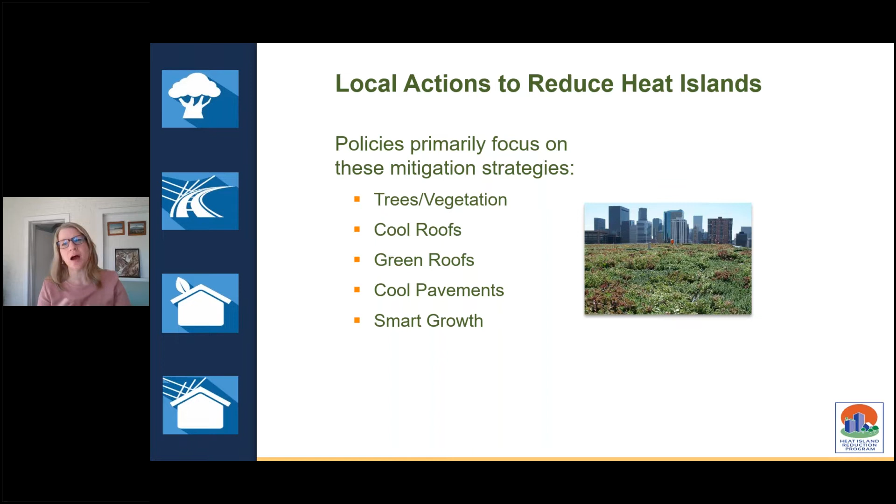Smart growth is something that we encourage people to look at because it's a way to sustainably develop our urban areas in a way that improves livability, walkability, and also incorporates a lot of these heat mitigation options, so that even though the city might be densely packed or designed, it can still be cool and have a reduced heat island.

The 2 buckets in general that are available to local governments for almost everything they do are voluntary and regulatory. And these voluntary options are just a few. And they range from the classic outreach and education, things that governments do to raise awareness of these issues. Those are kind of standard for most everything. Financial incentives, local governments are getting more creative.

A few examples are giving rebates for the construction of cool roofs. A lot of utilities also do that, actually, and that helps reduce energy. There are tax abatements in some communities for planting trees when you are constructing a new building. Some communities, if you are installing a green roof, will give you preferential permitting, which most developers love because it helps them go through the permitting process a lot faster.

Many, many cities give away trees and do workshops on tree planting and care. Grants, some localities just give money for demonstration projects and tree plantings like you see here. They give those to community groups, businesses. Award competitions, some of the classic things that local governments can do to encourage behavior change in a way that reduces heat islands.

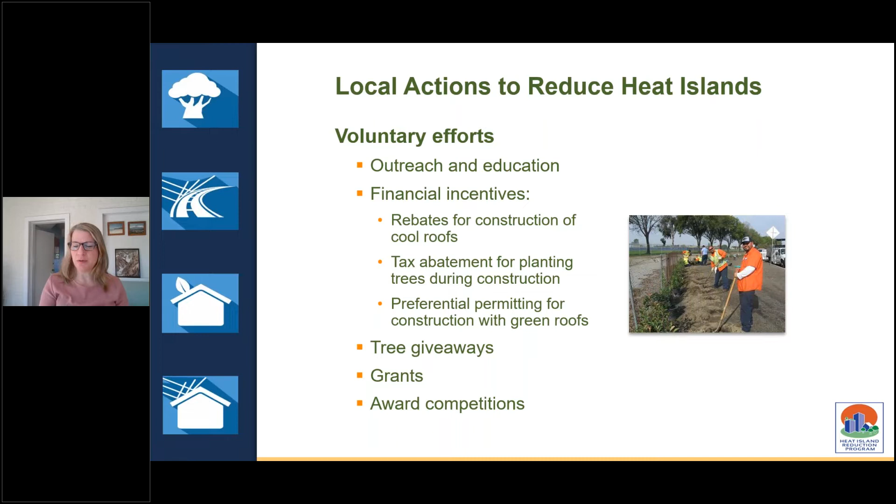On the regulatory side, these are just a few, again, for those localities that have control over their building and energy codes. They have a wide variety of options. One that is listed here, Los Angeles has been doing. They require that new homes in the city put on a cool roof. The utility will give a rebate, so that helps. But this is kind of an innovative way, at least as far as the residential sector is concerned.

Zoning laws, oftentimes if you have a parking lot, you are required to have shading, or sometimes the size of your parking lot is restricted in order to just save space, but also reduce hard surfaces. Tree protection and landscaping mandates, several cities and counties require you to get a permit before you remove a tree.

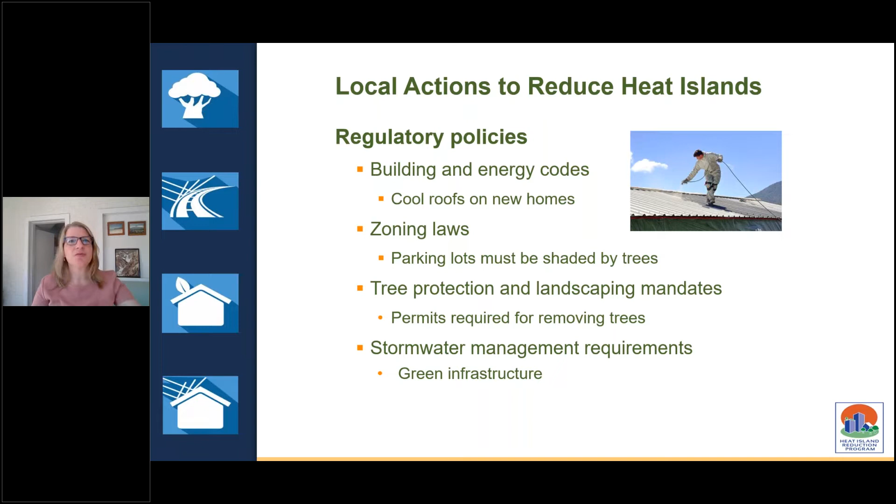And stormwater management, as we'll hear about from both of our speakers, even though a lot of those laws around increasing green infrastructure are focused on reducing stormwater runoff, they do have a heat island impact. And so this is a way to also encourage heat reduction through some of the stormwater regulations that are out there. So I wanted to be quick.

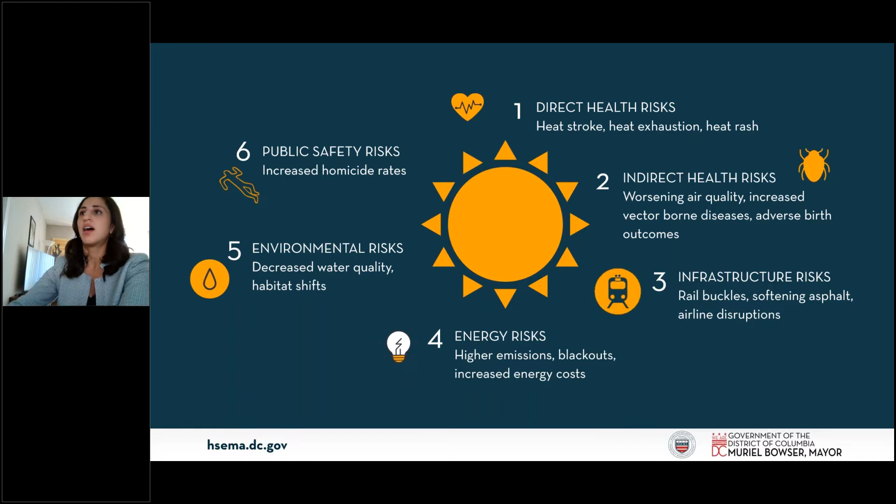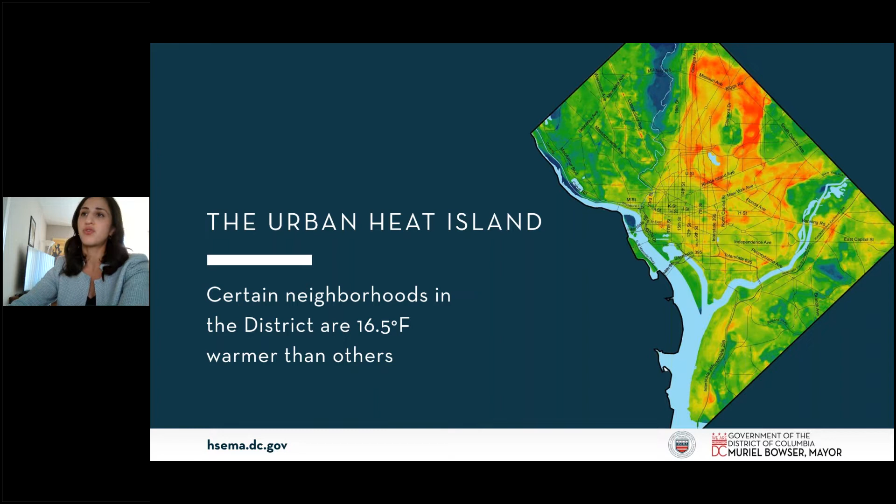And so we wanted to bring together all of the different agencies and stakeholders that have a role to play in heat and work together to develop a plan. So from the very beginning, it was an interagency process. So the heat plan draws on some of the mapping and modeling that I know the last webinar focused on. So I'll run through this pretty quickly, but we did have the NOAA pilot of looking at the urban heat island and have used the ambient air temperature map that they created in all of our work to really identify where to focus in on strategies and what the issues are within the district.

We layered in information on demographics, and we actually created a few different versions of a sensitivity and exposure map. So the sensitivity map is really showing the demographic characteristics. So it looks at age, pre-existing health conditions, income, race, all of the things that we know increase your sensitivity to heat. And then our exposure map takes that ambient air temperature map and also adds in information about our tree canopy and impervious surface. And then we created a combination map.

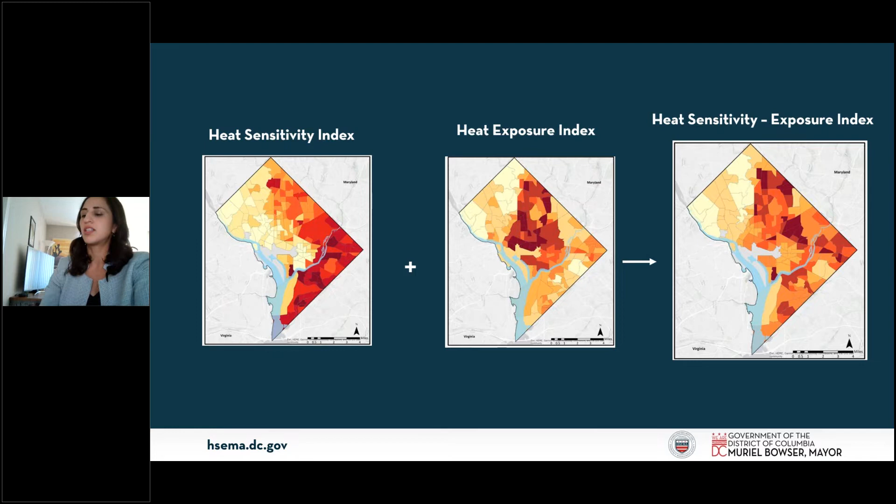And we actually have a couple different versions of this combination map, one that overemphasizes heat sensitivity, one that emphasizes heat exposure, and then the one that you're seeing here is 50-50. And the reason why we did that is because if we're doing policies that really target the heat island, we might want to focus those on areas that have high exposure. And if we're doing policies that target more social programs, we might want to focus more on areas of high sensitivity. So we wanted to look at all of those factors.

We also did a follow-on to our heat mapping work with Vivek Shandas, the same researcher that's behind some of that work, to really try and understand which interventions actually make a difference when it comes to reducing the urban heat island. And underpinning that was a question about affordable housing. So the district has a goal of building a lot more affordable housing in the district, and we have the question of, can we both support our affordable housing goals and our urban heat goals, and understand a little bit more about which interventions work in the process?

And so we looked at 3 different blocks throughout the district. I'll go through 2 of those where there was going to be housing built, and said, can we do something to increase affordable housing and decrease heat at the same time. So this block actually is one where there was no slated redevelopment.

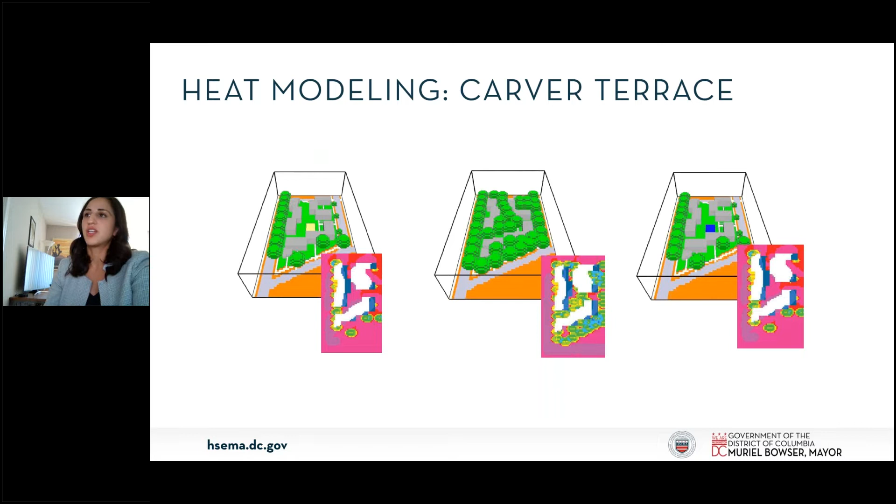It's already affordable housing. And so we just asked, what can we do to make that area more comfortable? And we looked at adding lots of trees. We looked at adding a water feature. We looked at cool pavements, and really found here that trees were the only thing that made a significant difference.

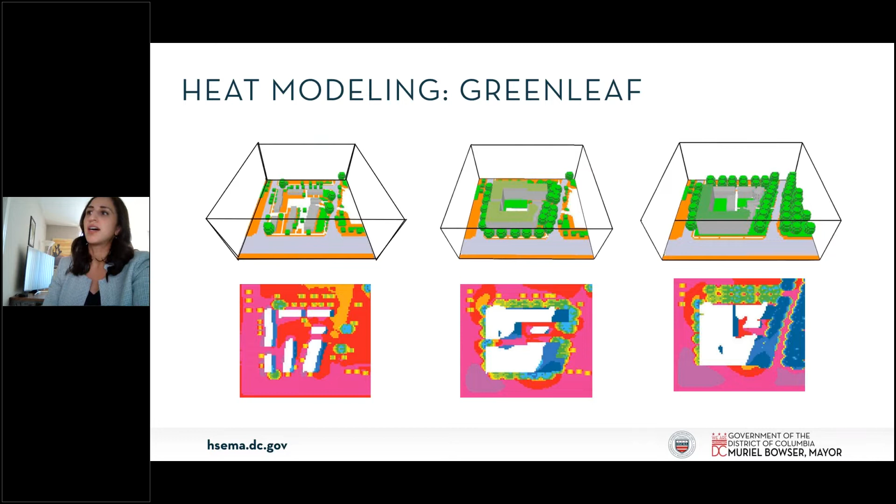So some lessons that we learned from this is that trees really were the big winner, while green roofs and cool roofs may have an impact on the building efficiency and may be useful at scale. And that's something that we're actually looking into with the EPA. At a single block level, as we were looking, they didn't seem to have a big impact on pedestrian level heat and thermal comfort.

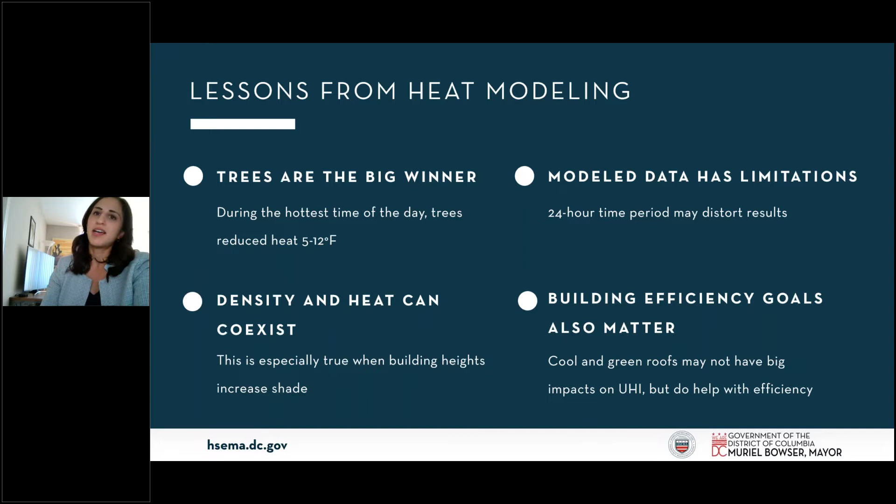And we also found that density and heat can coexist. So the third one that we looked at was actually a totally vacant property, and what happens if we added a building to what is now a grassy field, and we were able to decrease the urban heat island in that property. And so that was really encouraging, though all of that to say with the caveat that this is all modeled results, and should be verified with real life measurements. So that's the next step.

And then the final piece of feedback that went into our heat plan was community feedback. So we had to pivot a little bit about what we were doing to collect community feedback because we were doing this in the midst of a pandemic. But what we ended up doing was holding four 2-hour focus groups with those communities that are most sensitive to the heat. So we had one that was a Spanish language focus group, one that focused on people who have experienced homelessness or service providers that work with people who experience homelessness, and then two that really focused on some of our lower income neighborhoods and elderly residents and residents who live in public housing, and just learned a ton through these focus groups.

Nuances like that our housing authority actually charges extra for people to have a window AC unit during the summer, and that's prohibitive for a lot of people. And so that provided a lot of context for what we did. And then we also wanted to have something that was a little bit more representative. So we did a survey that was an electronic survey, and that was specifically aimed at getting a good demographic mix of the city and the different neighborhoods.

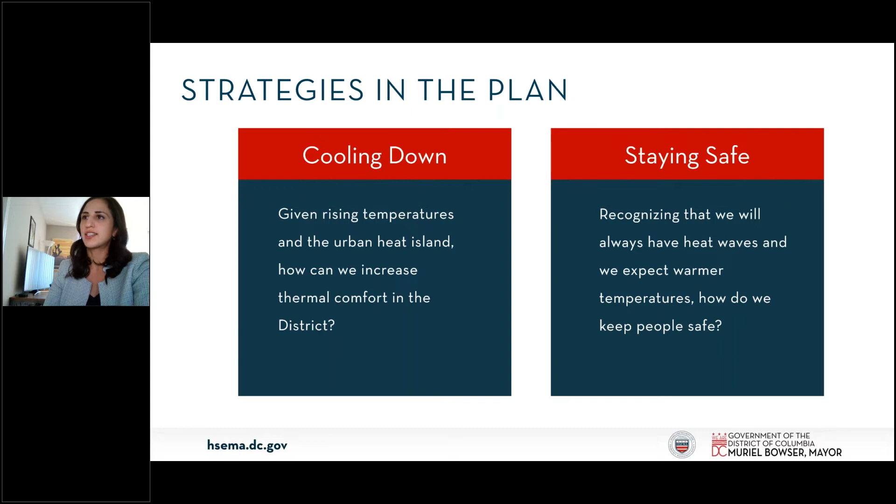So what's in the plan? We've divided the strategies into two basic chapters. Strategies on things that reduce the urban heat island, and then strategies recognizing that no matter what we do, we're still going to have hot days. So how do we keep people safe? And so I'm just going to run through some of the broad categories and then talk in more detail about some of these. But in the cooling down, it's a focus on increasing cool spaces where people feel heat the most. So where people are outside, where people are really exposed.

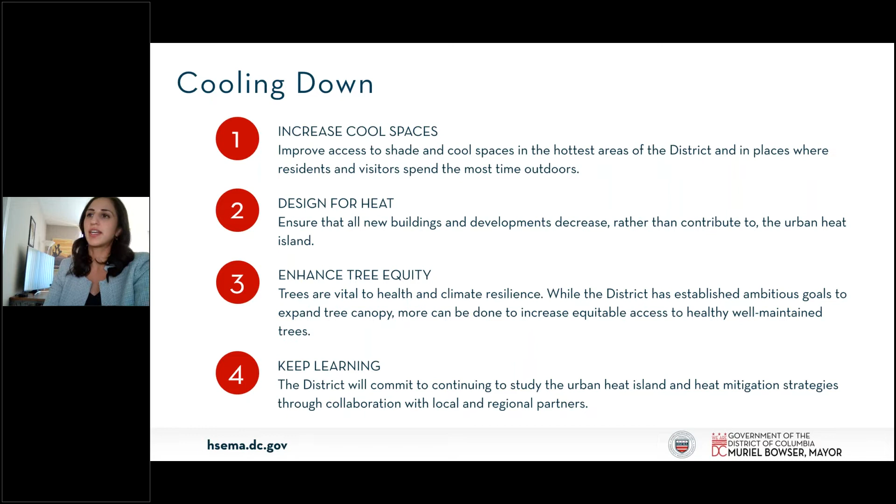Using the modeling study that we did to think about how we can better design for heat. Enhancing tree equity, we already have really ambitious tree goals. How do we make sure that we're layering in equity considerations into those tree goals and taking the feedback that we learned from our focus groups that if we're going to have places that have trees, they need to be well maintained, they need to feel safe, they need to be well lit. So thinking through all of those characteristics. And then the fourth one is to continue studying the urban heat island and better understanding it. So digging into a couple of these.

So for increasing cool spaces, our policy tool that we have here is really partnerships and mainstreaming. So we're working with our Department of Parks and Rec to make sure that every time they're redesigning a park, that they're thinking about shade, that they're thinking about splash parks, that they're thinking about trees.

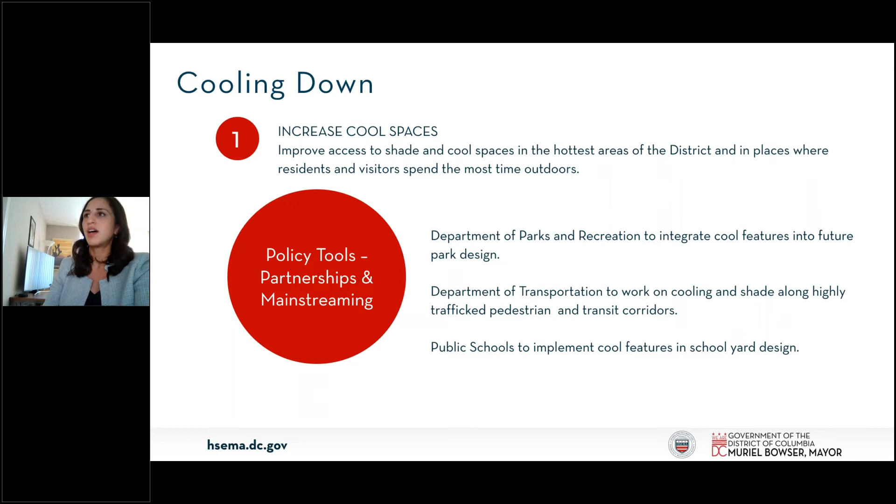Working with our Department of Transportation to think about how we can do cooling and shade along those transit corridors that are most heavily trafficked, where there's lots of pedestrians, lots of people out. Working with our public schools to figure out how, when we're doing schoolyard design, we're thinking about cooling. So that's really just integrating it into things that we're already doing.

When it comes for designing for heat, that's when there's more of that regulatory space and a way of using strategic capital investments. So I have lots of words on this slide that I won't read, but basically we have different tools in place. So we have something called the Green Area Ratio as an example, which is a zoning tool that basically requires that all property meet a certain number of points when they are doing a development,

and you can get points through putting a green roof, and you get different points if it's intensive versus extensive. You get points for ground level stormwater management practices. You get points for preserving a tree. So how can we use the information that we have about heat to tweak what point values we're giving to all of those things so that we're encouraging people to do the things that are best for cooling?

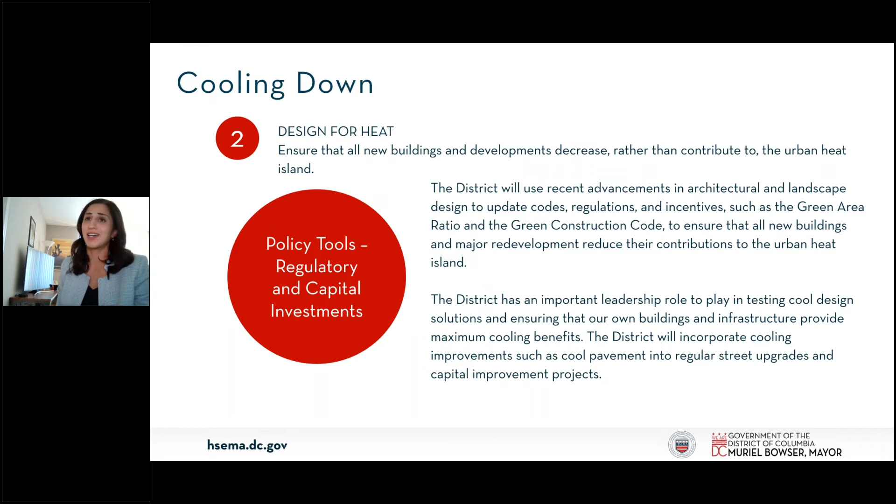And then in the capital investments phase, how can we make sure that every time the district is spending money on something that we are being a good role model and thinking about cooling in that. So then in the staying safe section, we have a few different strategies on improving cooling centers, education, supporting safety in the home, and then supporting safety outdoors and ensuring reliable power.

Digging into a couple of these, so supporting safety at home. This was one of the things that we really heard from our focus group and from our survey, was that people did not want to leave their house to get cool. They wanted to stay home. So what can we do to make sure that people have access to cool spaces where they actually live?

And so one of the things in the regulatory space that we're looking for is setting a maximum air temperature. There are a couple of cities that have done this, and so we're looking to them as models. It's a pretty new cutting edge thing for cities to do, that while we have minimum habitability requirements for the winter, we don't have that same thing for the summer. So can we do that? And that would really get to the rental properties and some of the challenges that renters in particular face.

But there's also a lot that we should just do through education and outreach. For example, a lot of people don't know the low-cost cooling techniques that are most effective for their home. They don't know just the basics of ventilation. So making sure that we are putting out materials on how to do that, and then also expanding our HVAC assistance program and really thinking about how we reach communities that may not think that they're eligible, like people who are undocumented.

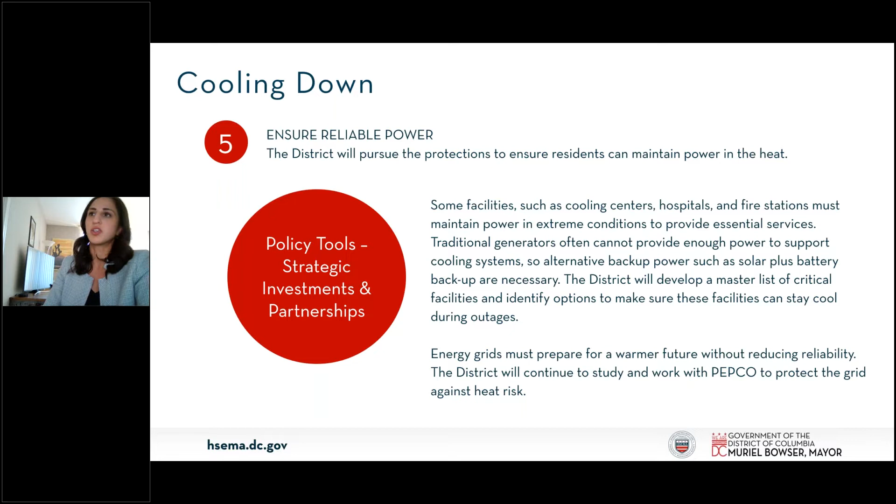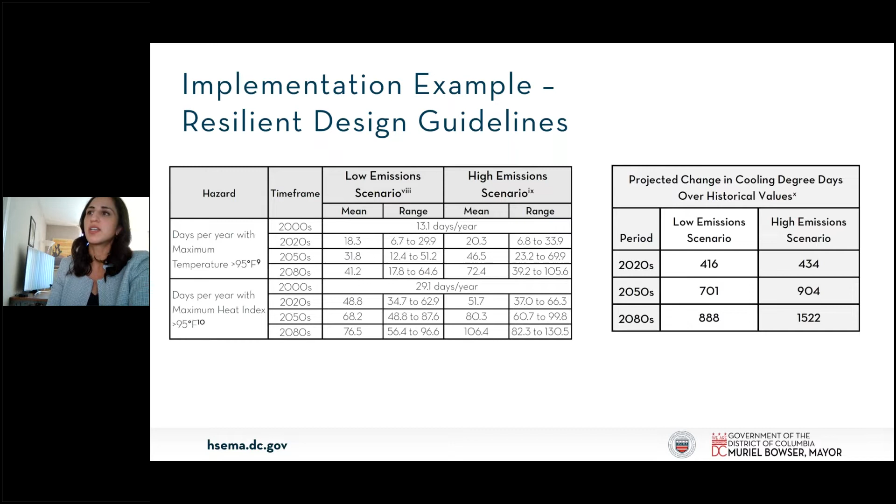So just to finish off, one way that we're implementing already is that we developed resilient design guidelines, where we took our high heat days and translated those into cooling degree days, which is how building developers think. So that allows our building developers to right size HVAC units. So that has been an effective first step. Some challenges, I won't go super deep into a lot of these because you all know that funding is a challenge, providing heat related benefit cost analyses is a challenge.

But some of the things that we face as a district is getting the political will to do some of the regulatory changes that we need to do. Just making sure that residents are vocal about the challenges that they're facing. And then the nuances of implementation. For example, we have a cool roof ordinance that requires cool roofs on all new residential buildings, but it's not necessarily well enforced or well advertised. And so sometimes it doesn't happen. And also people just have one roof and they have many decisions about what to do with that one roof.

And then one final example of a challenge is that we are often relying on our stormwater goals to implement our different heat strategies, because stormwater interventions also often provide heat benefits, but a lot of those are paid for by stormwater credits, which actually encourage work in the areas in the periphery of our city where we don't have a combined sewer, which happens to be an exact inverse of our heat island, which is just one of the challenges that we face when trying to use that policy mechanism.

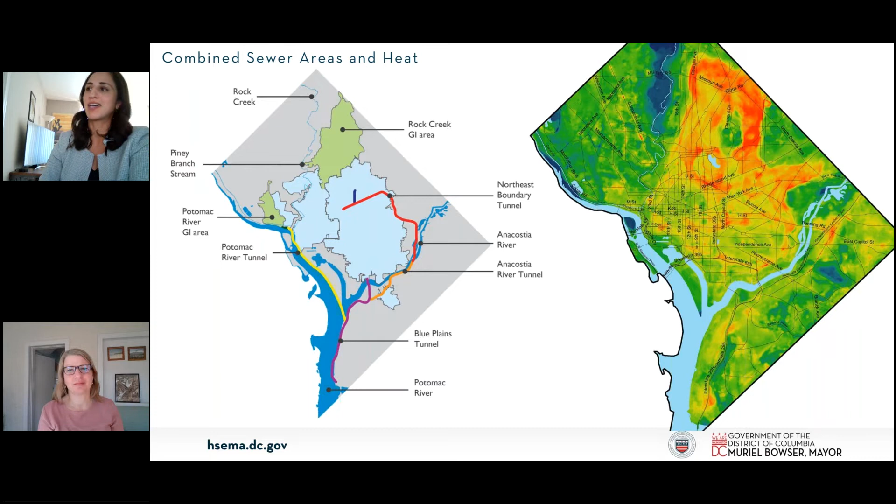Thank you. Thank you very much, Melissa. I commend you on all the hard work you guys have to do. And I hope that we can keep working together at EPA to maybe help you guys. That's the goal. We appreciate the challenge you have, but great work so far. It's awesome to see the successes.

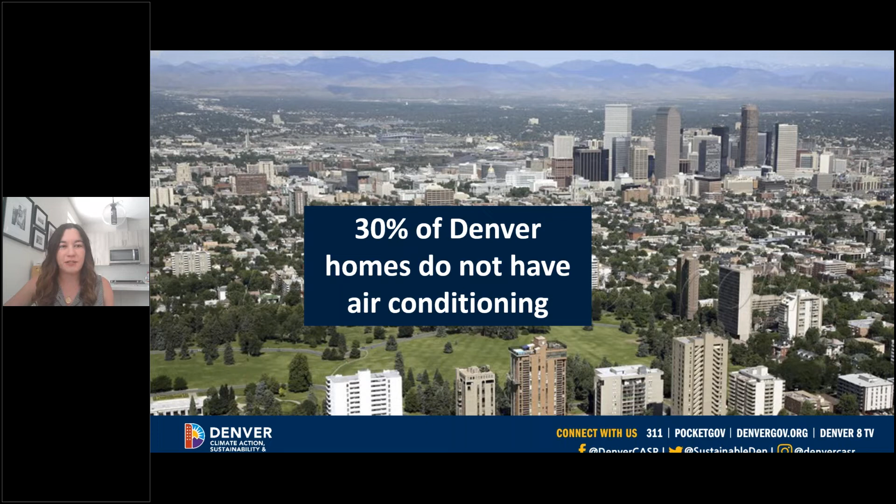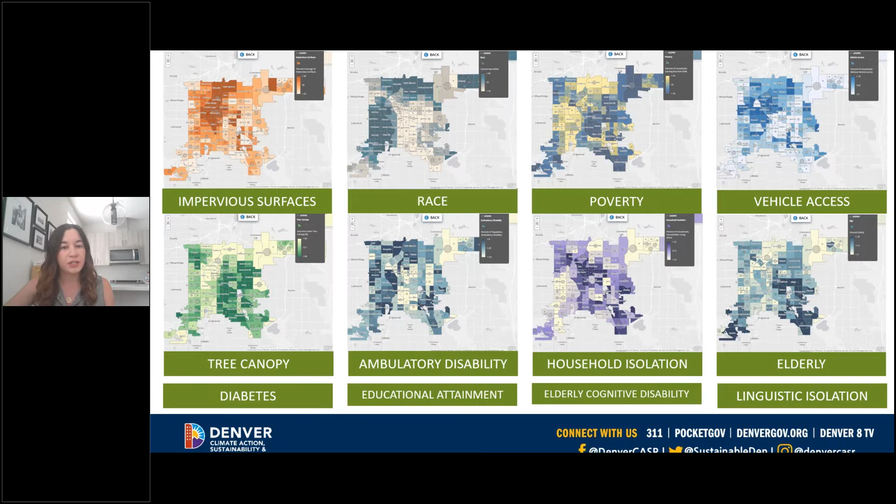So Denver created a heat vulnerability map combining several measures of built environments, demographics, and human health, similar to what you saw in Melissa's presentation. So we're looking at different ways to map it, like impervious surfaces, the tree canopy, household isolation, so people that are living by themselves, the elderly population, different disabilities, poverty, race, all of these combined to create this heat vulnerability index. So this is a composite measure of those previous maps you just saw. This map really helps us to compare and get a better understanding of how specific populations will be affected, and to help identify possible opportunities for intervention to help mitigate climate change.

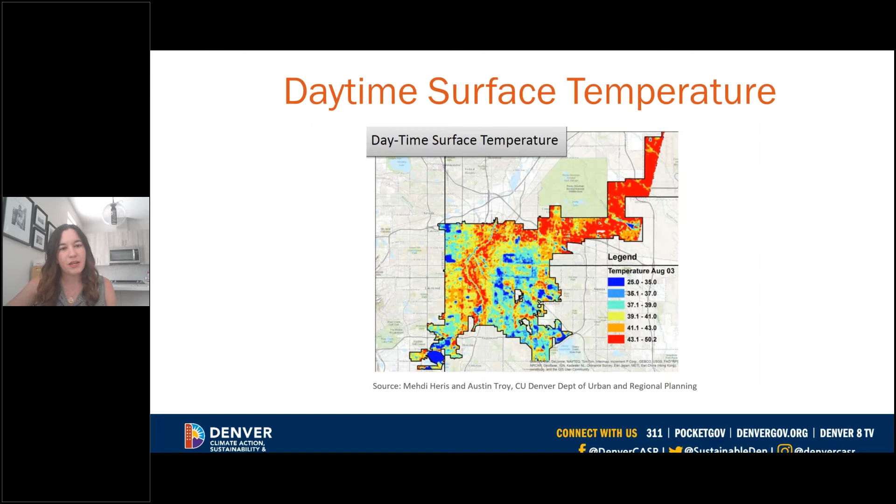And so to help mitigate urban heat island effect, an analysis of the regulation structure can really help to identify those opportunities. So we've got the codes and regulations, and then we have ordinances such as the zoning code and the Green Buildings Ordinance, as well as the Denver building and fire codes. So things like the I-codes, which are mandatory, like the IECC, the IBC, as well as the Denver Green Code, which is a voluntary code.

So I'm going to talk a little bit about the Green Buildings Ordinance in the next couple slides. So what is the Green Buildings Ordinance? It was created from this citizen-led green roof initiative that passed in 2017. It did have a lot of challenges because the language is copied from Toronto, so it created some legal conflicts. It conflicted with state water laws. It conflicted with building code regulations and definitions within the code.

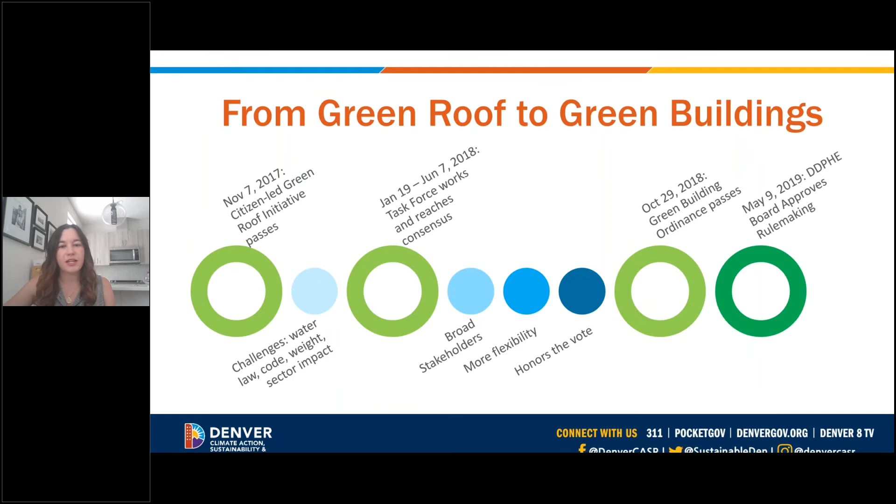So there was a task force created to help transition that green roof initiative into the Green Buildings Ordinance. We worked with stakeholders on more flexible options, because this is a requirement, so how does everybody meet these requirements? And making sure it honored that original vote of the Citizen Green Roof Ordinance. So finally, the Green Buildings Ordinance passed in 2018, and it approved the rulemaking in 2019.

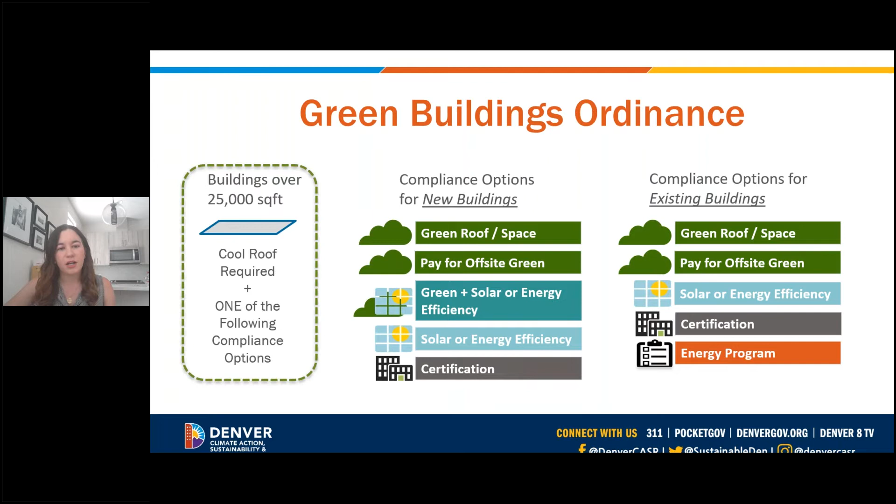So things like installing green space or green roof, paying into a green building fund, which Denver would then use to build green space within the city, looking at solar, energy efficiency, and certification. So those are very similar on both sides for new buildings and existing buildings. They do have different thresholds, but the existing building also has this energy program in that orange color you see. So this actually breaks it down to five more options for buildings.

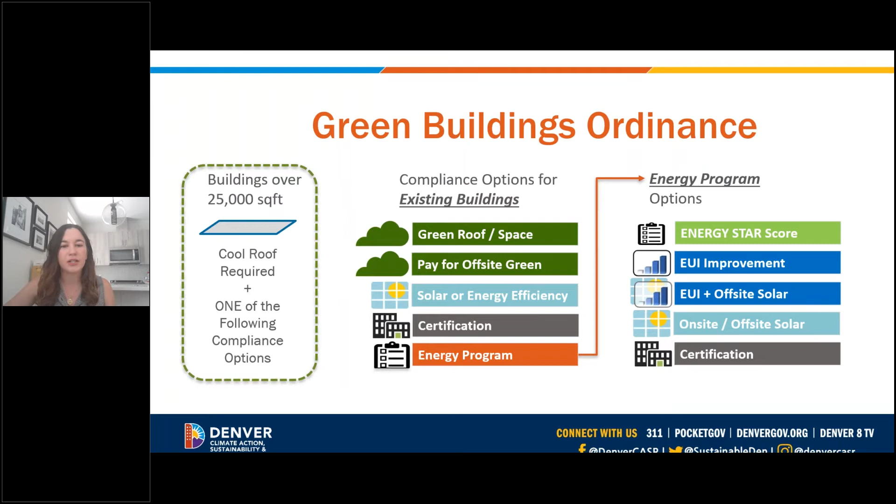Again, because it's a requirement, we want to make sure that buildings do have the opportunity to comply. That's not making it easy, but it's giving them the opportunity to meet their requirements. So this energy program for existing buildings has an Energy Star score option, an EUI improvement based on your square footage, off-site and on-site solar, and different certification levels.

So the benefits from the Green Buildings Ordinance include helping to reduce that urban heat island. We're adding more green space, so there's less impermeable surfaces, more trees, and it's also addressing water and stormwater management, as well as reducing greenhouse gas emissions through all the different compliance options.

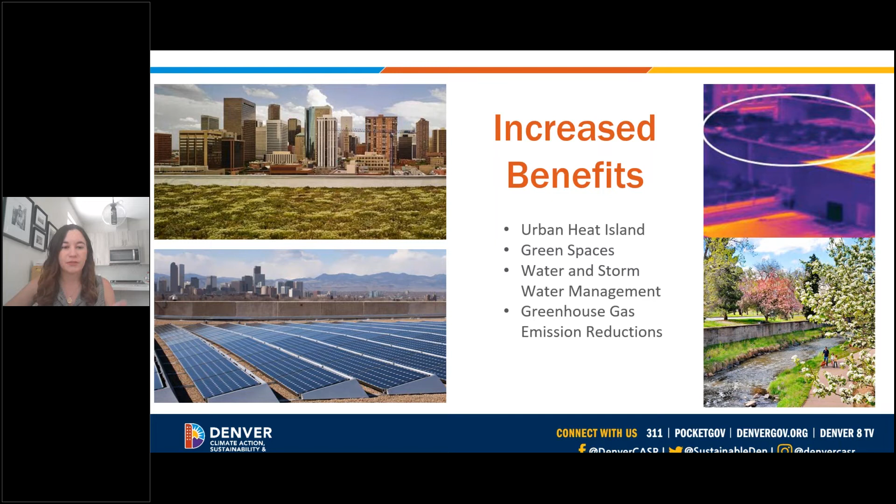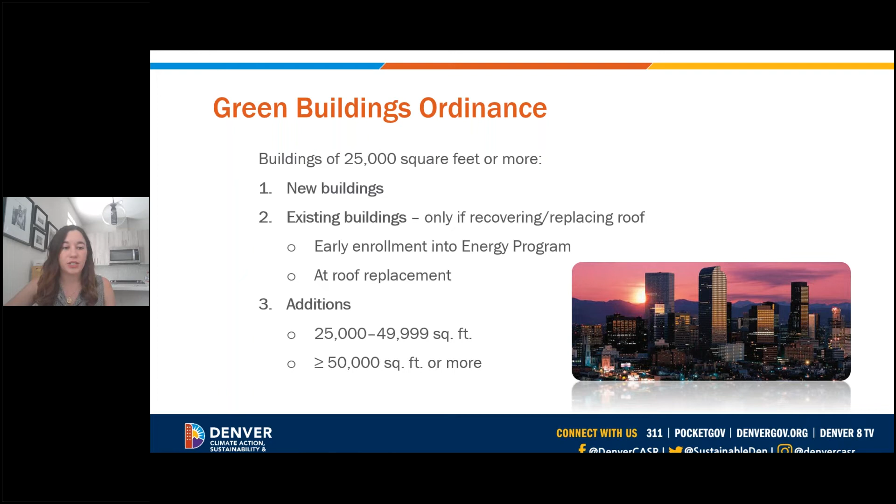So here's the Green Buildings Ordinance and who it applies to. I've mentioned that it's for buildings over 25,000 square feet. It's for new buildings, so all new buildings that meet that square footage. For existing buildings, but only at roof replacement. So when they're going to replace the roof, they have to apply for the permit in a certain way that requires them to do a cool roof, as well as choose one of those compliance options. It also applies to additions, and there are different requirements for the square footage.

So going back to the codes and regulations that we have, the Denver Building and Fire Code, as I mentioned, has the I-codes and the Denver Green Code, which is voluntary. And this code is a stretch code that's updated every three years. It allows the community to really test provisions and become familiar with them before they possibly get moved into mandatory. So after that three-year cycle, provisions are evaluated to see what can be moved to mandatory code.

So maybe something goes into zoning or into the base codes, the I-codes. And then in that same cycle, we're looking at how to add more progressive provisions into the Denver Green Code to really reflect the community's vision for Denver.

So currently we're in the middle of the code adoption process. I'm not sure how many of you are from Denver, but I'll try to make this pretty general as a process. So we just finished up our working groups with the community. We had a series of community working groups where we talked about energy and sustainability. From there, we're developing proposals based on those meetings and what we heard from the community, as well as we accepted applications from anyone in the public. So anyone could submit their own idea for a code concept.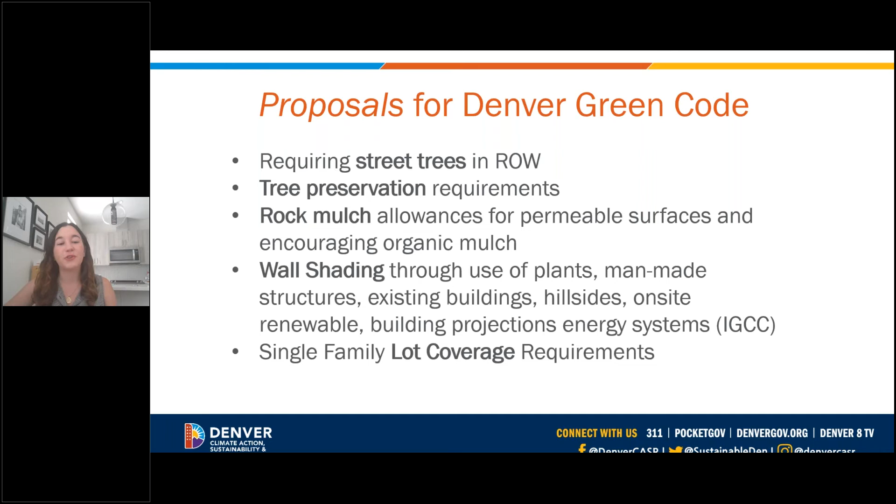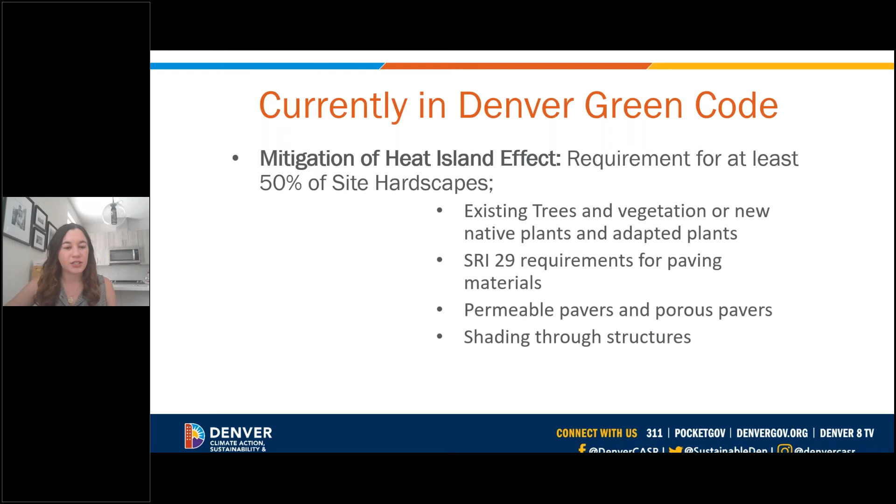Great, thanks, Courtney. I think you've illustrated very well the multiple environmental challenges that local governments face and how they need to be creative in finding solutions that address more than one of those while at the same time addressing citizens' needs. And so congratulations.